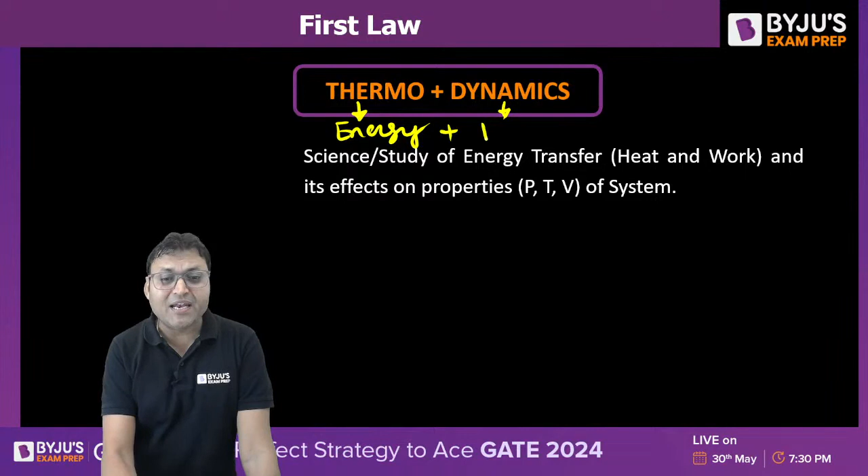Thermodynamics is nothing but energy in motion. So what does that mean? In thermodynamics, we study the energy transfer which can take place either in the form of heat or work, and the effect of this energy transfer on the properties of the system, right? That is known as thermodynamics. So we will be talking about the energy transfer through the first law of thermodynamics.

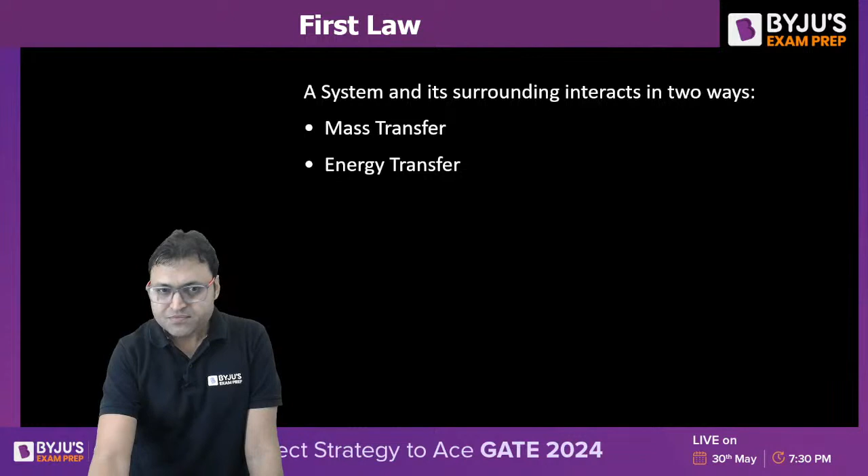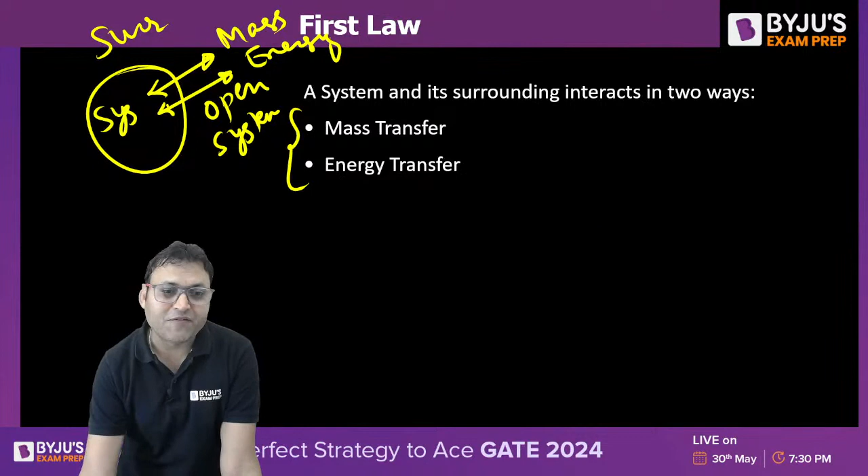Now, a system and the surrounding. Do you know what is a system? What is surrounding? A system and the surrounding interact with each other in two ways, either in the form of mass transfer or in the form of energy transfer, or both. So we are talking about open system. In case of open system, the interaction between system and surrounding can take place with the mass transfer or with the energy transfer. But if it is a closed system, then the mass transfer does not take place from the system to the surrounding.

I hope you guys are aware about that, because I am not talking about what exactly is a system, what is the surrounding, how the energy interaction or the mass interaction between system and surrounding takes place. But the overall picture is, a system is a region upon which our study is concentrated, and everything other than the system is known as the surrounding. So system and surrounding talk to each other in the form of energy transfer from the system to the surrounding or from the surrounding to the system.

And they talk to each other in the form of mass transfer. Mass can transfer from the system to the surrounding or from the surrounding to the system. That is about the open system. But if it is a closed system, it means no mass transfer takes place. For a closed system, the only interaction between system and surrounding is through energy transfer, and energy transfer can take place either in the form of heat or in the form of work, isn't it? Heat and work.

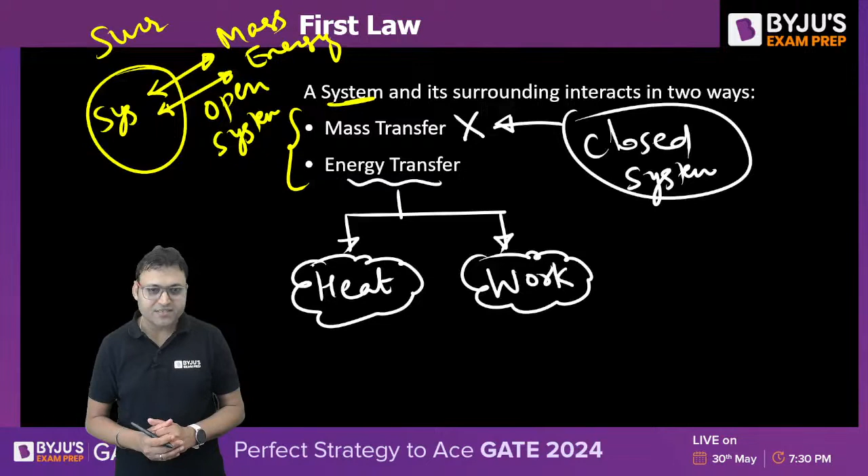And if it is an isolated system, do you know about isolated systems? There are three types of system based on the interaction between system and surrounding. In an isolated system, no mass transfer takes place between the system and surrounding, and no energy transfer takes place between the system and the surrounding. That is called an isolated system. Example is universe. Universe is an example of isolated system.

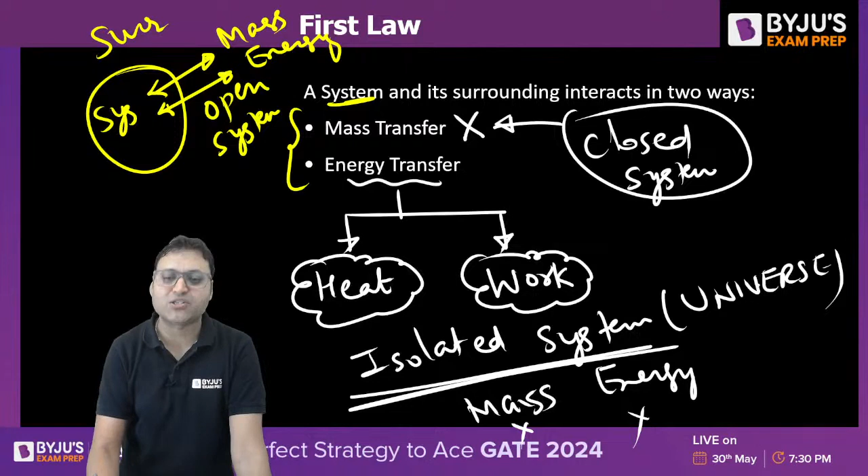Universe is nothing but system plus surrounding taken together. System as well as the surrounding taken together becomes the universe. So from the universe there is no mass transfer. From the universe there is no energy transfer. So the isolated system does not interact, neither in the form of mass transfer nor in the form of energy transfer.

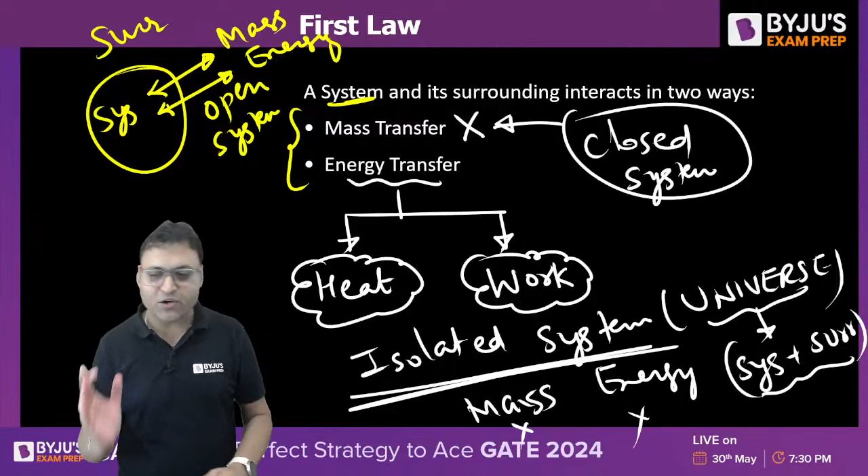All right. Now let us see what is heat transfer. The energy transfer due to temperature difference is known as heat transfer, denoted by Q. And heat transfer always takes place from high temperature to low temperature, isn't it? When T1 is greater than T2, the transfer of heat will take place from T1 to T2. If T2 is greater than T1, then the transfer of heat will take place from T2 to T1.

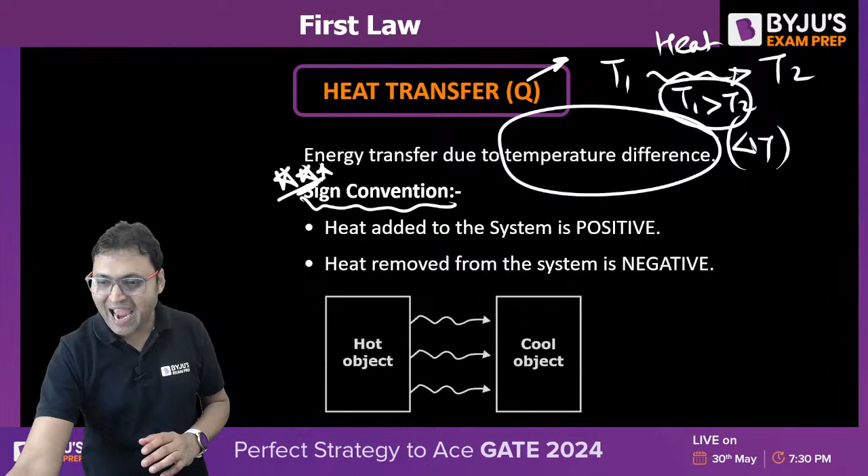Very, very important is sign convention, because sometimes the heat is transferred to the system or sometimes from the system to the surrounding. System is the region on which our studies focus. So whenever the heat is entering into the system, it will increase the energy of the system, so that will be taken as positive. And when the heat is rejected from the system, it will decrease the energy of the system. That will be taken as negative. So that is about heat transfer, denoted by Q. That is one form of energy transfer.

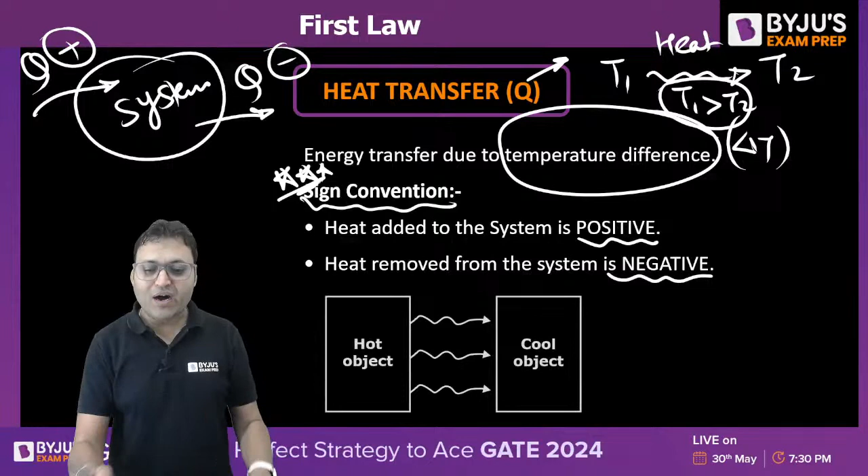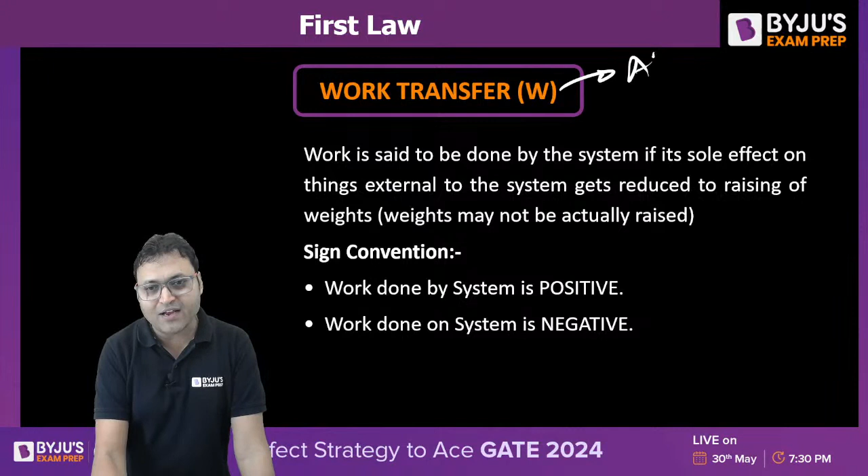The other form of energy transfer is the work transfer. In simple words, all the other forms of energy transfer other than heat transfer are known as work transfer. For example, if electrical energy is transferring to the system, we will call it electrical work transfer. If mechanical energy is getting transferred, we will call it mechanical work transfer. If chemical energy is getting transferred from the system to the surrounding or from the surrounding to the system, we will not call it heat transfer. We will consider it to be work transfer.

The technical definition of work transfer is this one. Work is said to be done by the system if the sole effect on the things which are external to the system can be reduced to raising of weights. The weights may not be actually raised. But how do we separate heat from work? When the energy transfer is taking place due to temperature difference, it is heat transfer. And when it is not due to temperature difference, it is called work transfer, right?

And the sign convention says work done by the system on the surrounding is taken as positive, whereas the work done on the system is... sole means entire, sole means complete effect, or entire effect, right Virendra? So work done by the system is taken as positive and work done on the system is taken as negative.

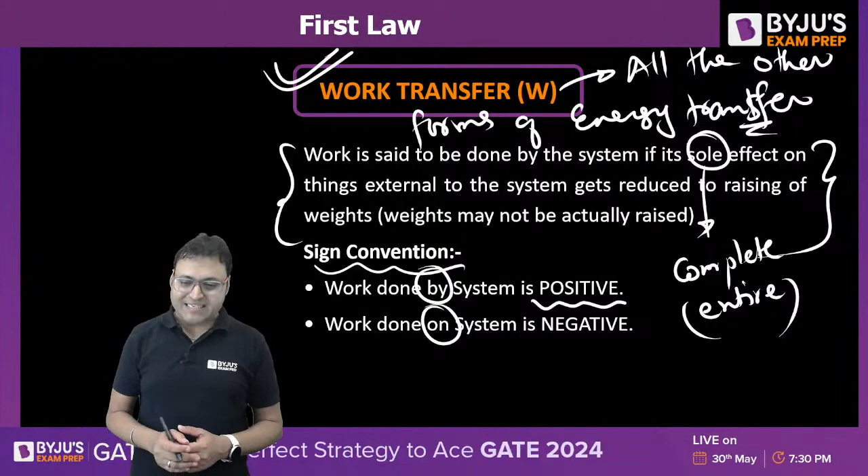So what I have discussed so far is the interaction between system and surrounding happens in two ways: mass transfer and energy transfer. Energy transfer can be divided into two parts, heat or work. Heat transfer happens when there is a temperature difference, and all the other forms of energy transfer happen without the temperature difference, right? If it is an open system, there will be mass transfer, but if it is a closed system, only energy transfer will take place. And if it is an isolated system, insulated system is different.

Thermally insulated system means there is no heat transfer. Insulated is not the same as isolated. When we say isolated system, mass transfer will be zero and energy transfer will be zero. When it is an insulated system, only heat transfer will be zero. There is a difference between insulated and isolated system, right?

So let us talk about the first law. We are ready to explore the first law of thermodynamics now.

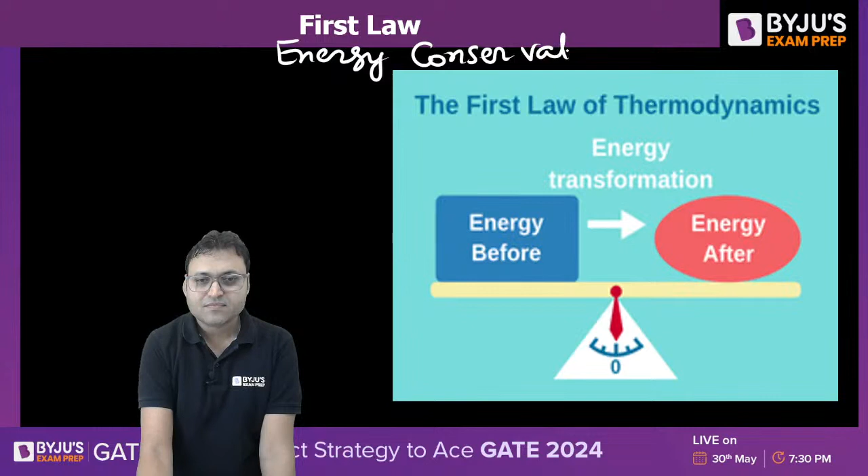So what do you understand by the first law of thermodynamics? Can you let me know what exactly is the first law? First law of thermodynamics is nothing but energy conservation law. It is also known as Joule's law. It is also called quantitative law.

Why do we call it quantitative law? Have you heard about that? The first law of thermodynamics is nothing but energy conservation law. We can also call it Joule's law because Joule was the first one who gave this law. And it is also known as quantitative law because energy has quantity, magnitude, as well as quality.

So the first law of thermodynamics does not talk about the quality of energy. It only says the quantity of energy remains constant. Energy conservation means energy always remains constant. Energy can neither be created nor destroyed, quantitatively. Qualitatively, there is a degradation of energy that we will discuss in the second law of thermodynamics.

All right. So according to energy conservation, for a system, can we say some energy will be entering and some energy will be leaving? So can we say the energy entering into the system minus energy leaving from the system is nothing but change in energy in the system?

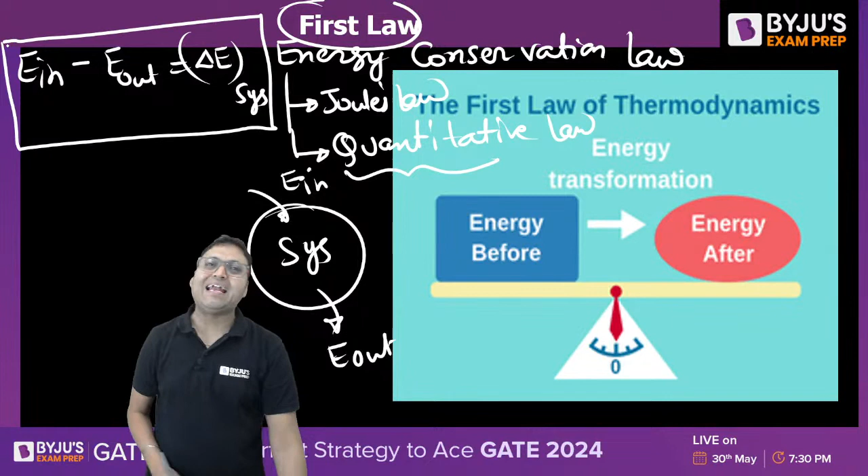Some amount of energy will enter into the system, some will leave, and energy entering is like your income, energy out is like your expenses. Your income minus expenses is your saving, isn't it? The energy entering into the system minus energy leaving from the system is nothing but change in energy of the system.

So let us try to understand the significance of these parameters, LHS as well as RHS. Let us talk about the RHS first. What exactly is the energy change of a system? What do you understand by the change in energy of a system?

Look, in thermodynamics we are talking about a simple compressible system. In fluid mechanics, we talk about incompressible fluid. For a simple compressible system, change in energy of a system is equal to change in internal energy plus change in potential energy plus change in kinetic energy of the system.

This is called microscopic energy because it is associated with the molecules. The energy stored inside the molecules increases the internal energy of the system. The other two are known as macroscopic because they are associated with the system: change in potential energy and change in kinetic energy. So the total energy change is microscopic energy change plus macroscopic energy change, right?

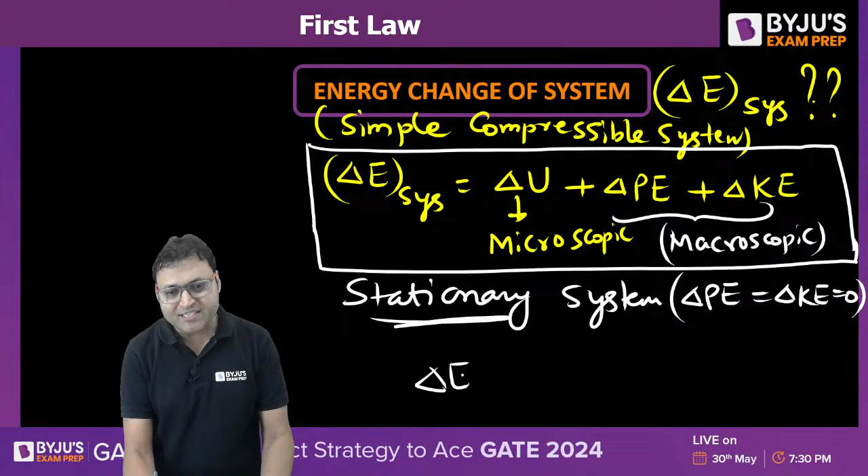If the system is stationary, there is no change in potential energy and no change in kinetic energy. For a stationary, simple compressible system, change in energy of the system is nothing but change in internal energy of the system. U is known as internal energy, which is associated with the molecules of the system. That is why it is known as microscopic.

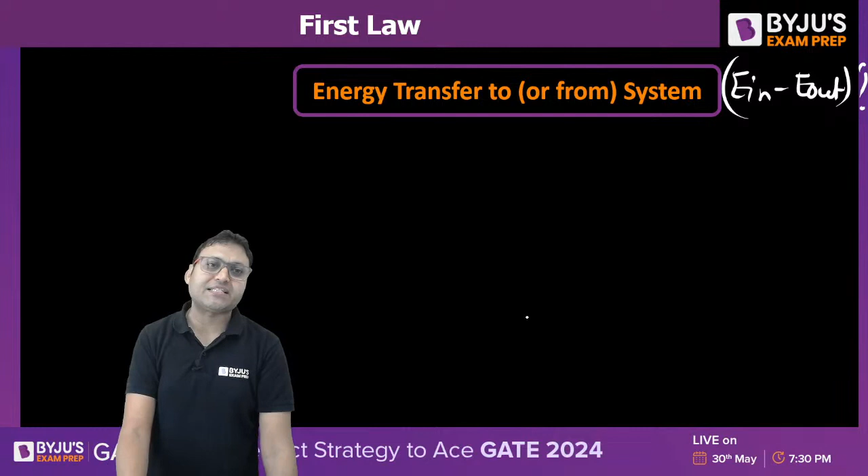Now, what is the energy transfer E in minus E out? That is the energy transfer from the system to the surrounding or from the surrounding to the system. So we can say E in minus E out. The energy interaction takes place in the form of heat transfer, right? So we can say Q in minus Q out in terms of heat transfer.

It can take place in terms of work transfer, W in minus W out, and it takes place in the form of mass transfer, or there is some energy associated with the mass transfer. So we can say energy in along with the mass transfer minus energy out along with the mass transfer. So the total energy interaction will take place in three ways. One is in the form of heat transfer, another is in the form of work transfer, and the third one is associated with the mass transfer.

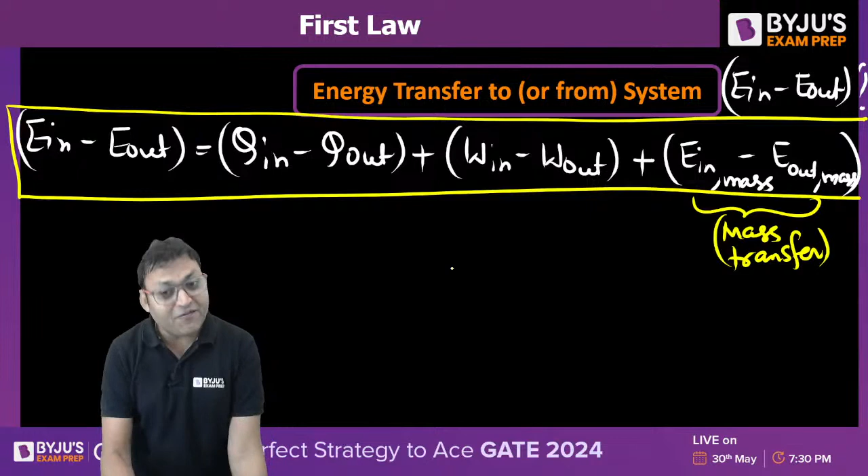If there is a mass transfer taking place from the system to the surrounding, there is some energy associated along with the mass transfer that is represented by the third term. And if it is a closed system, what about the mass transfer? Do you agree mass transfer will be equal to 0? I had already told you. For a closed system, the mass transfer will be 0. And if the mass transfer is 0, this term will become 0.

Do you agree or not? For a closed system, the third term will be equal to 0. This is the first term, this is the second term, this is the third term. Do you guys understand it or not? Please give me yes.

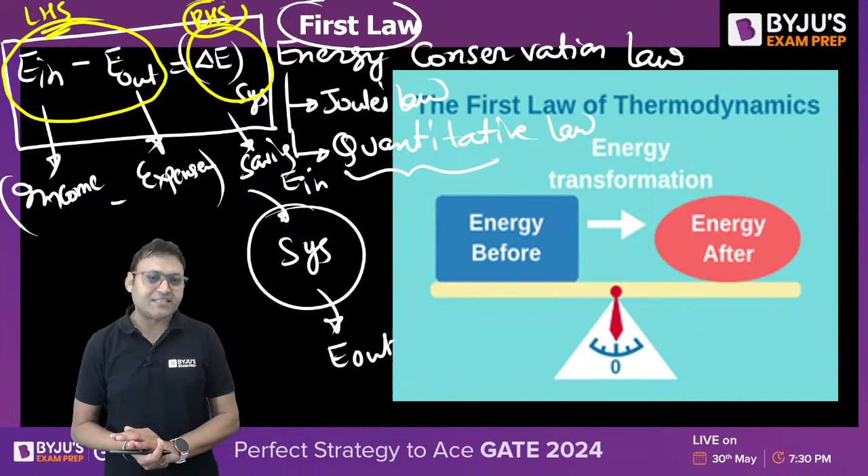So can we say energy entering into the system minus energy leaving from the system is simply Q in minus Q out plus W in minus W out. That is for a closed system. Right? This is the expression. So for the first law of thermodynamics, which involves LHS and RHS, the energy interaction between the system and surrounding is equal to change in energy of the system. That is what we have discussed.

The change in energy of the system is simply the potential energy change, kinetic energy change, and the internal energy change. The energy transfer is along with the heat transfer, the work transfer, and the mass transfer. And if it is a closed system, there is no mass transfer taking place. So we can say the energy transfer is with the heat transfer and with the work transfer only.

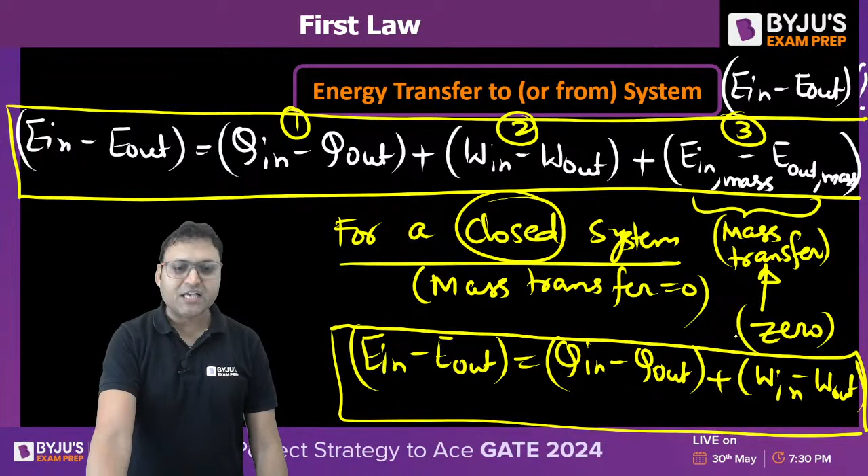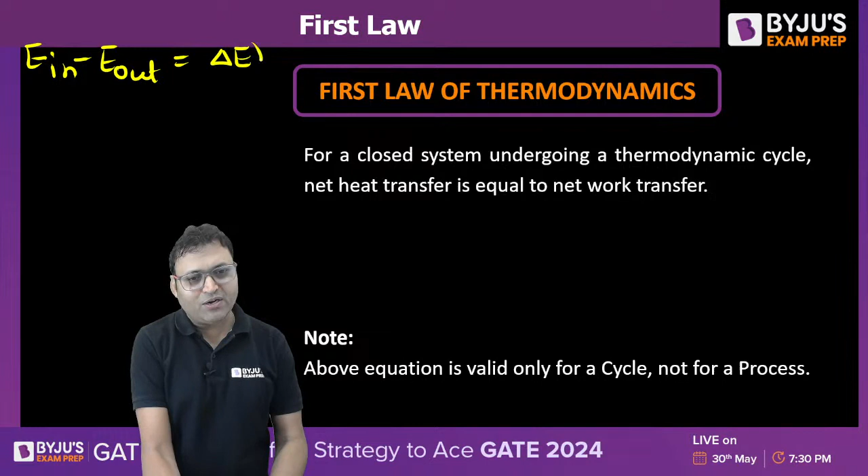Now let us modify this first law of thermodynamics. What is the first law of thermodynamics? It says E in minus E out is equal to change in energy of the system. That is the basic energy conservation equation. When it is a closed system, do you understand mass transfer will be equal to 0? For a closed system, mass transfer will be 0.

And if it is undergoing a thermodynamic cycle, do you know thermodynamic cycle? For a thermodynamic cycle, the initial and final points remain the same. So do you agree, for a thermodynamic cycle, delta E, change in energy of a system undergoing a thermodynamic cycle, will be 0. So we can say E in will be equal to E out. Or we can say Q net, the net heat transfer, is equal to W net, net work transfer. That is the first law applied for a closed system undergoing a thermodynamic cycle.

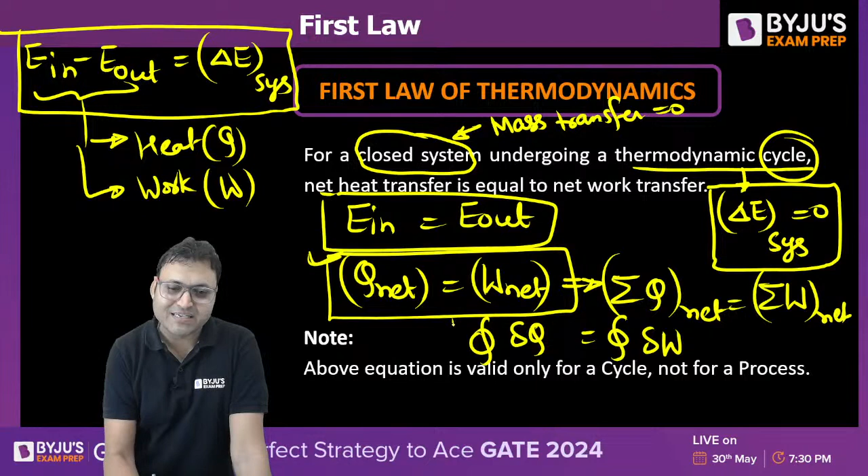Or we can say sigma Q net is equal to sigma W net, because energy interaction will take place in the form of heat transfer and in the form of work transfer. So net heat transfer should be equal to net work transfer. Or we can say cyclic integration of del Q is equal to cyclic integration of del W, because heat and work are path functions, they are not properties. So this equation is valid only for a cycle.

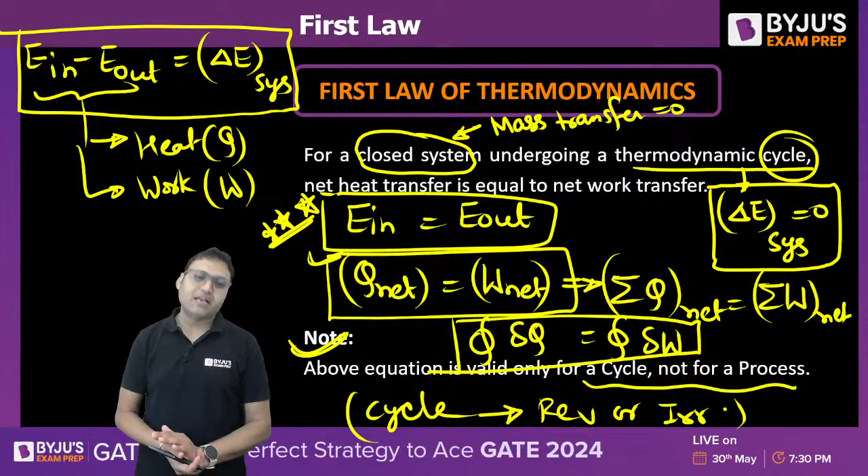This is another way of representing the first law of thermodynamics applied for a closed system undergoing a thermodynamic cycle. So net heat transfer will be equal to net work transfer. It is valid only for a cycle, not for a process. And the thermodynamic cycle can either be reversible or it can be irreversible. Do you understand it?

Let me take an example. If there is a system undergoing a thermodynamic cycle 1 to 3, Q1 to 2 is positive, heat added to the system, Q2 to 3 is negative, heat rejected from the system, and Q3 to 1 is also positive, heat added to the system.

Then work done during this cycle: work done W1 to 2 is positive because it is done by the system. W2 to 3 is negative because it is done on the system, and W3 to 1 is again positive because it is done by the system. So we can say Q net is equal to W net. This expression will be used with sign.

They must be used with sign. So we can say Q1-2 minus Q2-3 plus Q3-1 should be equal to W1-2 minus W2-3 plus W3-1. That is the first law of thermodynamics applied for a cycle. Or we can write it as Q net is equal to W net.

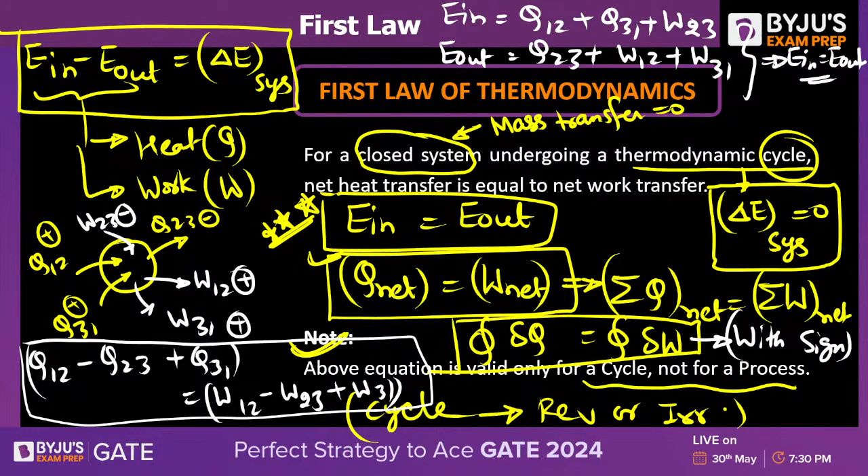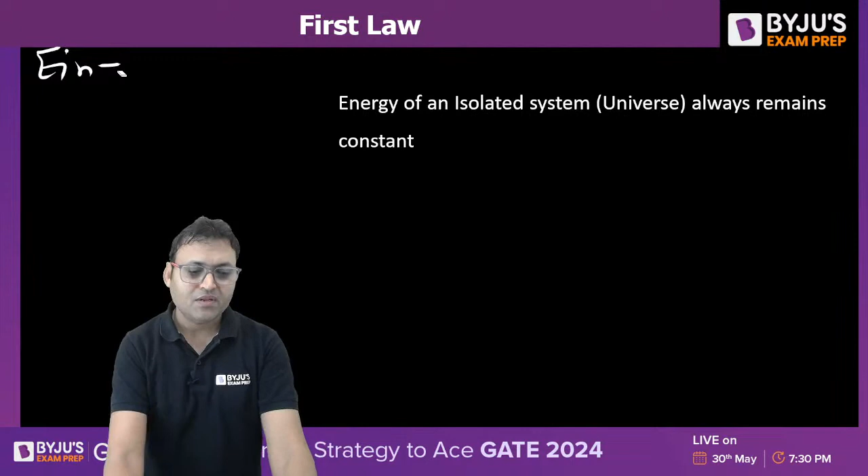Q1-2 plus Q3-1 plus W2-3 is equal to Q2-3 plus W1-2 plus W3-1, isn't it? So either we say E in is equal to E out, or we can say Q net is equal to W net for a thermodynamic cycle. And if it is an isolated system, I told you, E in minus E out is equal to change in energy of the system. That is our first law of thermodynamics.

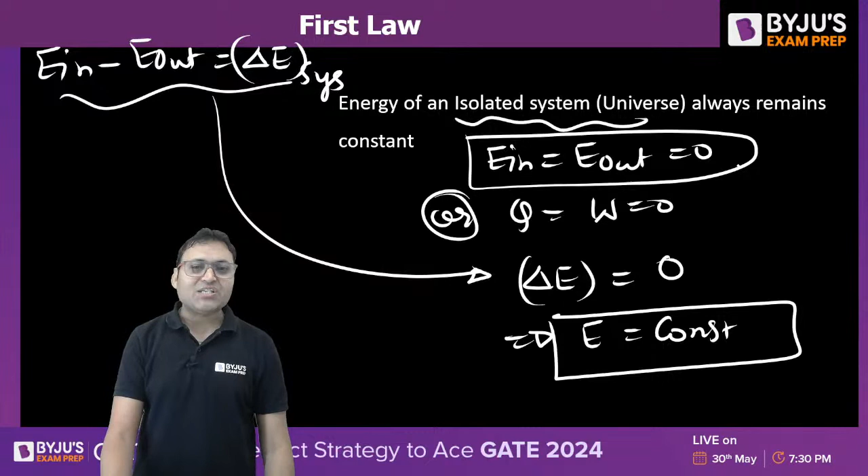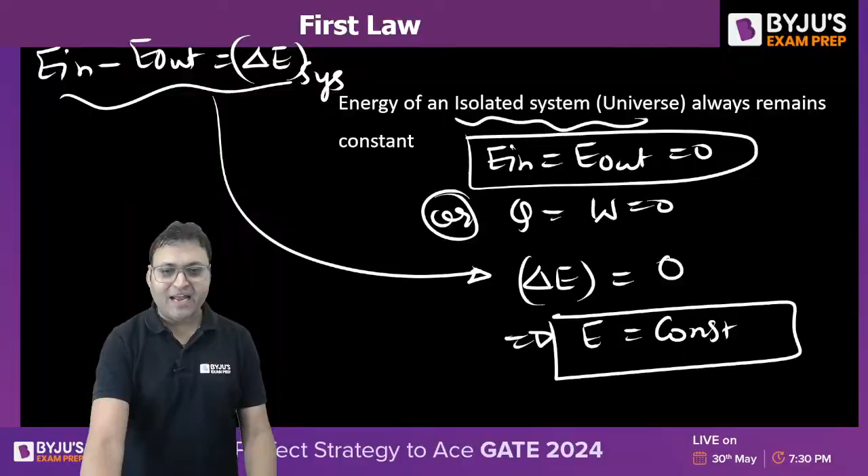For an isolated system, there is no energy entering, there is no energy leaving, it is equal to 0, or we can say Q is equal to W is equal to 0. So if this is 0, then from the first law of thermodynamics we can say delta E is equal to 0, or energy remains constant. The total energy of an isolated system always remains constant, because an isolated system does not involve any mass transfer, does not involve any energy transfer. So for an isolated system, the energy change will be 0, or the isolated system will have constant energy throughout.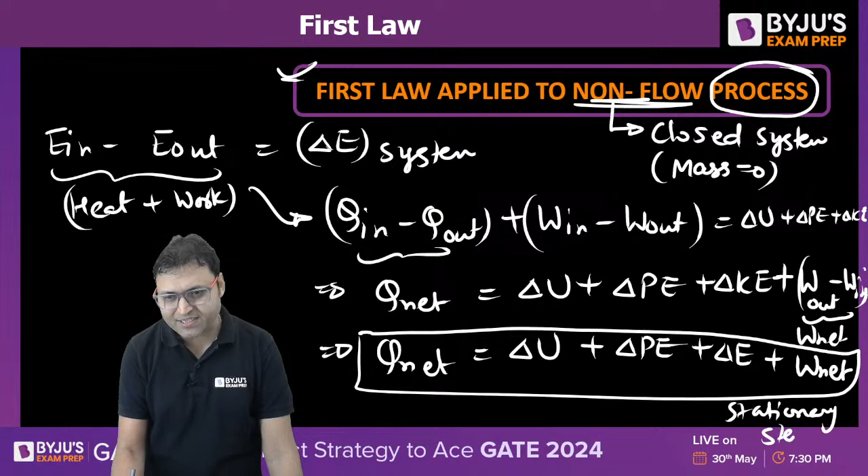So we can say Q net is equal to delta U plus change in potential energy plus change in kinetic energy plus W net. This is another way of writing our energy conservation equation for a closed system undergoing a process. And if there is no change in potential energy and kinetic energy, for a stationary system, can we say Q net is equal to delta U plus W net? Do you agree?

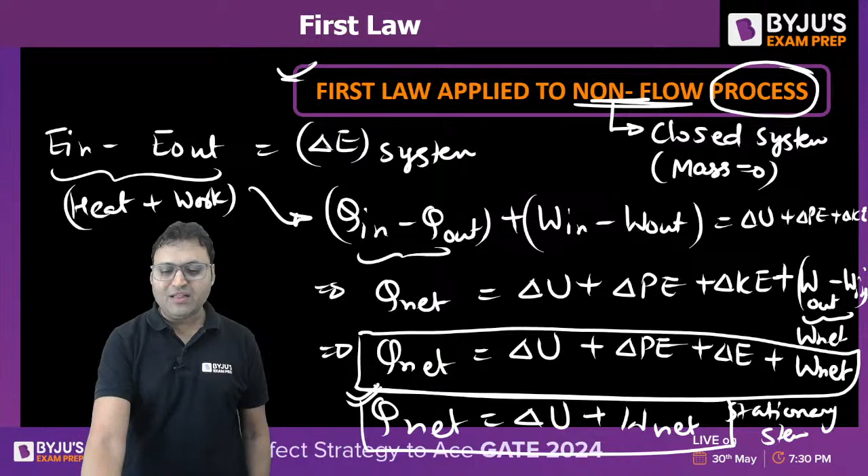For a stationary system, Q net is equal to delta U, change in internal energy, plus W net, that is the net work transfer. Use with sign. All the parameters should be used with the sign. That is the first law applied to a non-flow process.

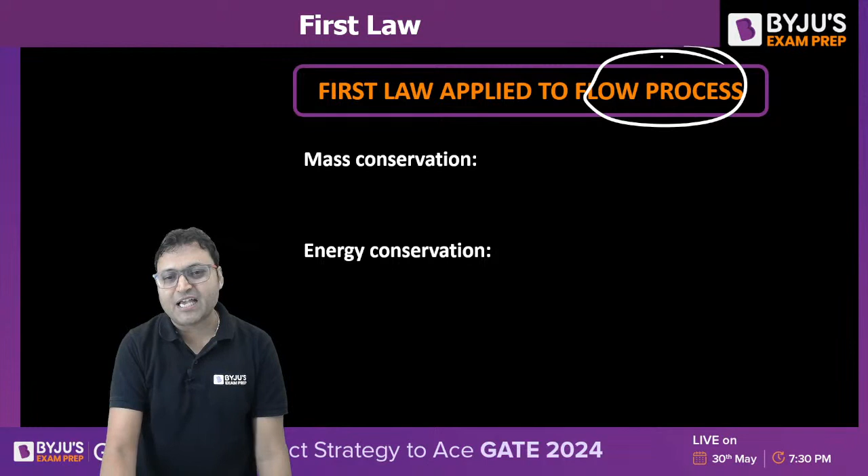And if it is applied to the flow process, there is mass transfer that takes place in the flow process, or we can call it an open system. Flow process means open system. There is a mass transfer along with the energy transfer. That is the difference between closed system and open system. So there is a mass transfer. So we can say M in minus M out is equal to change in mass in the control volume.

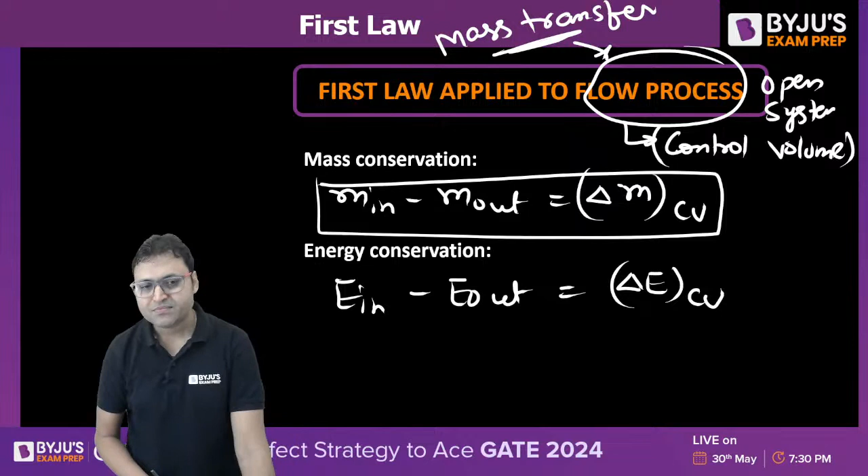The way we write the energy conservation is E in minus E out is equal to change in energy in the control volume. For the flow process, we use the control volume approach. We define a control volume if there is a mass flow taking place. So this is the energy conservation equation. Mass conservation and energy conservation equations can be written like this.

And this energy interaction takes place along with the heat transfer, along with the work transfer, and the energy transfer takes place along with the mass transfer, isn't it? It takes place along with the mass transfer.

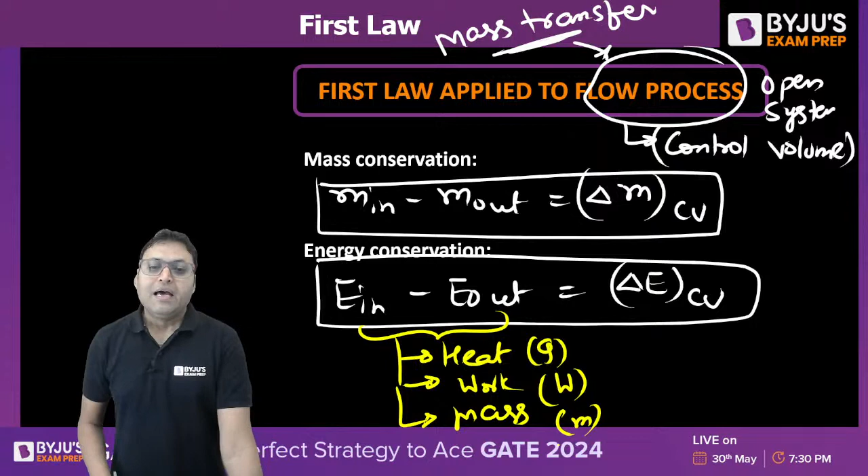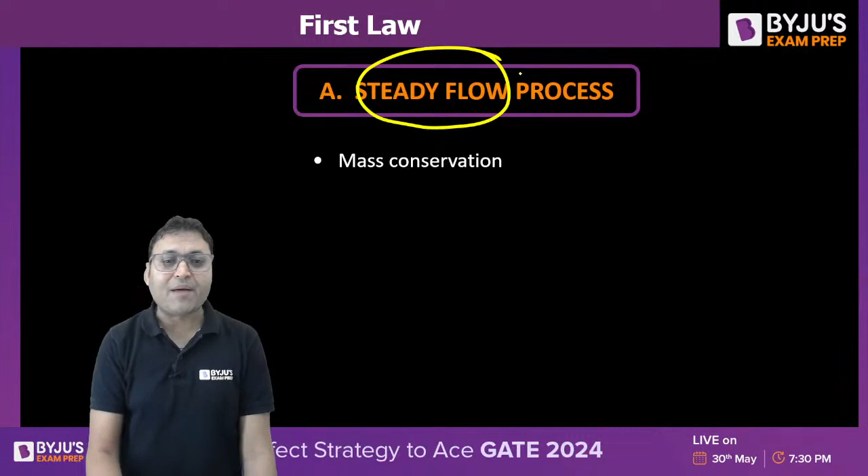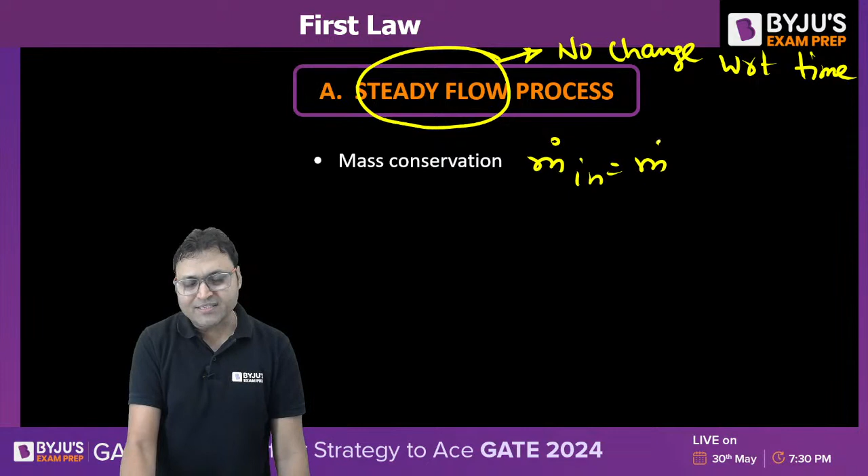Now the flow process can be divided into two parts. One is called the steady flow process. What is the steady flow process? When the parameters do not change with time. No change with respect to time. That is called a steady flow process. For a steady flow process, we can say mass flow rate remains constant. M dot in is equal to M dot out remains constant.

Or we can say the change in mass per unit time in the control volume will be equal to 0. That is the mass conservation for a steady flow process. For a steady flow process, change in mass in control volume will be equal to 0. So M dot in is equal to M dot out. Rho 1 A1 C1 is equal to rho 2 A2 C2. Mass flow rate entering will be equal to mass flow rate leaving.

C is the velocity of flow, and A is the flow area, and rho is the fluid density of compressible fluid or density of the system, right?

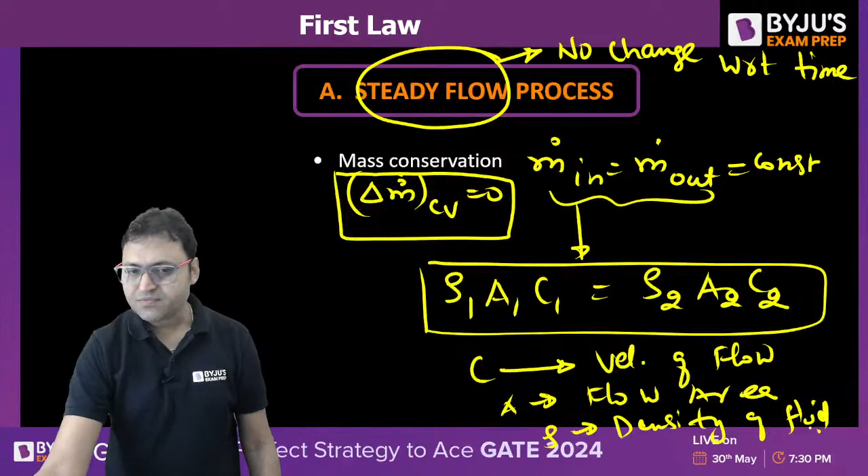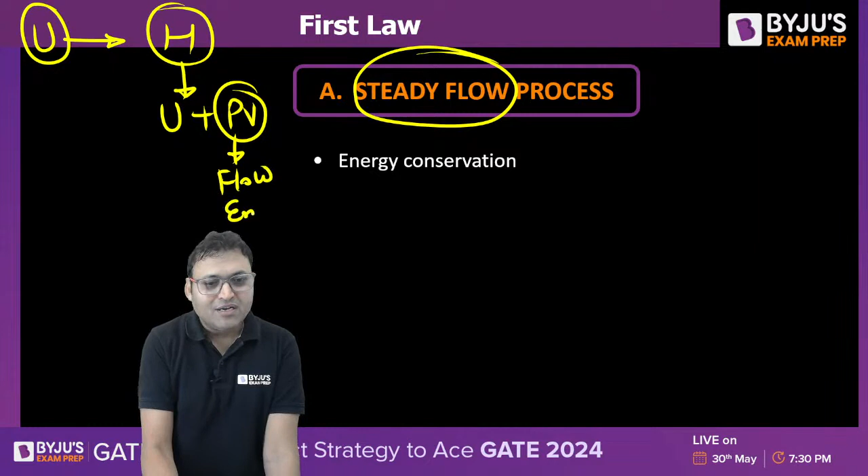And if we talk about the energy conservation for a steady flow process, look, U is internal energy, it will be replaced by H. This is the internal energy which will be replaced by H. Are you getting it? Why? Because H involves U plus PV. What is PV? That is called flow energy. The energy associated with the mass flow, that is called flow energy.

I told you that whenever there is a mass transfer taking place from the system to the surrounding, along with the mass transfer there is an energy transfer associated, and that energy transfer is called flow energy, which is associated with the mass transfer. So internal energy will be replaced. Our earlier equation was Q net is equal to delta U plus W net.

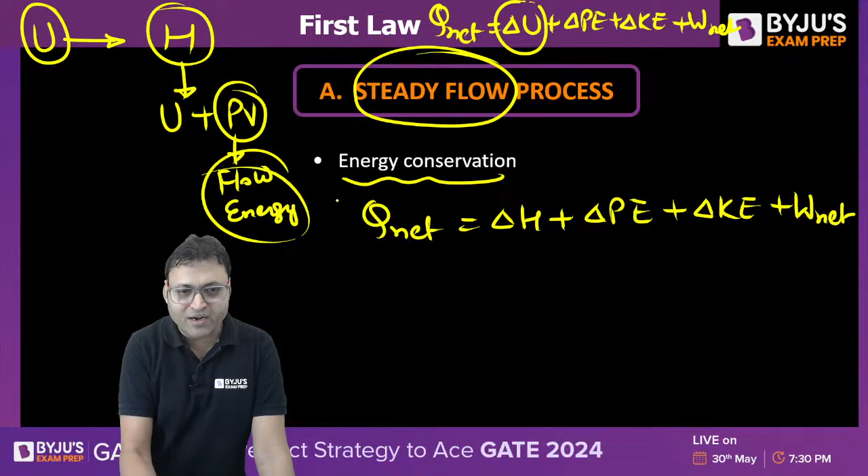Do you remember? So for a closed system, the first law was Q net is equal to delta U plus delta PE plus delta KE plus W net. So here U will be replaced by H. So the energy conservation equation will be Q net is equal to delta H plus delta PE plus delta KE plus W net. That is for steady flow process. That is the energy transfer.

If we write per unit time, delta H is H2 minus H1. Potential energy M into g into Z2 minus Z1. Isn't it? Change in kinetic energy half into M into C2 square minus C1 square. H can be written as M into h2 minus h1, specific enthalpy.

If we write it per unit mass, then we can say h1 plus C1 square by 2 plus gZ1 plus Q CV is equal to h2 plus C2 square by 2 plus gZ2 plus W CV. This is the energy conservation equation for a steady flow process.

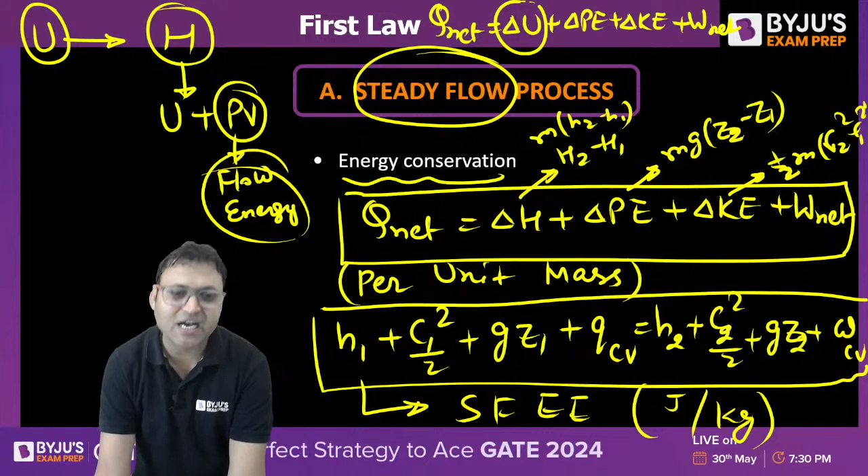What do we call it? Steady flow energy equation. And what is the unit of each and every term? It is joule per kg. This is known as the steady flow energy equation. That is how we obtain the steady flow energy equation for the steady flow process, right? And if it is an unsteady flow process, then things become a little more complicated.

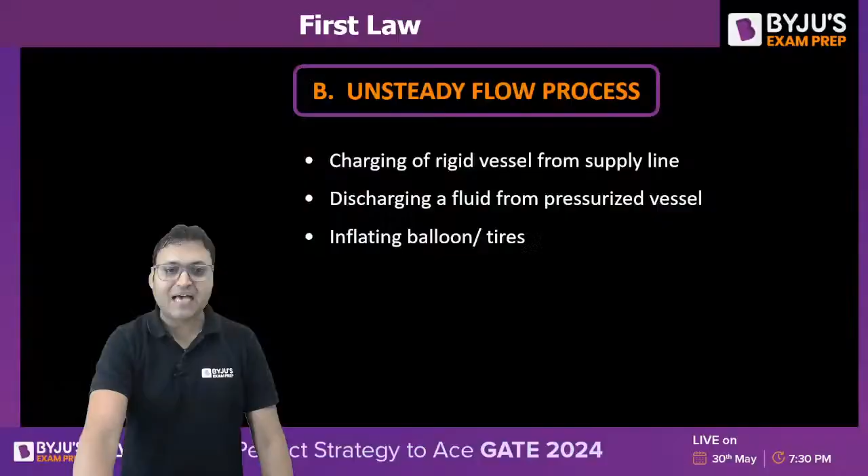All right. So let us talk about the last thing, that is the first law of thermodynamics applied to the unsteady flow process. Unsteady flow, when there is change with respect to time. Examples of unsteady flow processes: charging of a rigid vessel from a supply line, discharging of a fluid from a pressurized vessel, inflating a balloon.

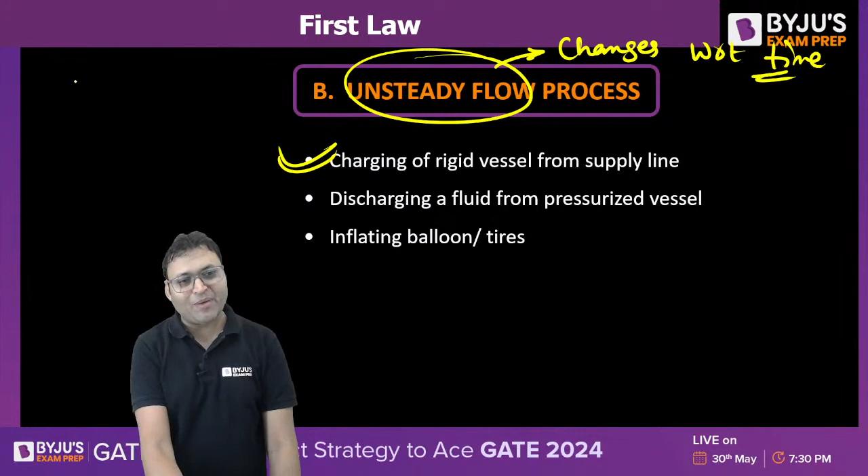This is our control volume, let us say, and the control volume is undergoing a process 1 to 2 due to some fluid entering at the inlet and fluid leaving at the exit. I for inlet, E for exit or outlet. 1 is the initial state and 2 is the final state. These are the notations we are going to use to develop the expression.

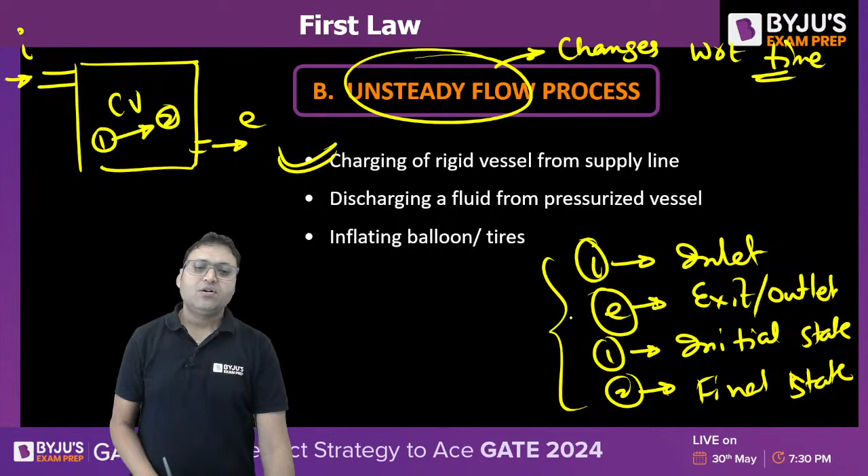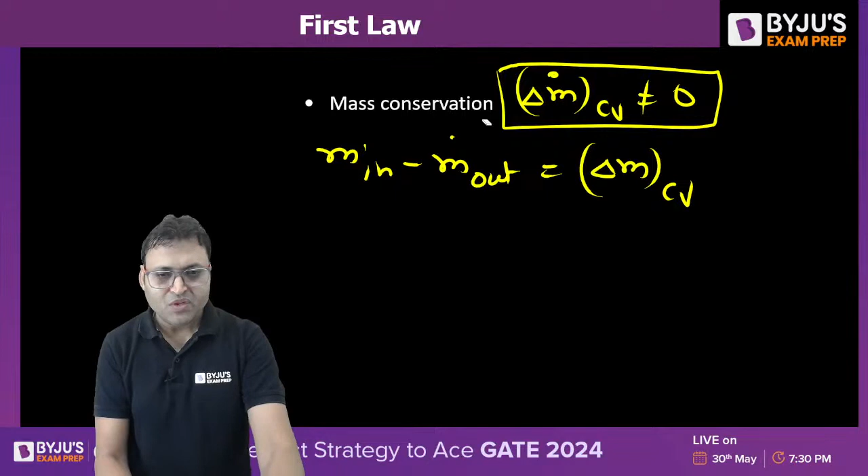So if we talk about the mass conservation, the rate of change of mass is non-zero, or we can say m in minus m out is equal to change in mass in the control volume. That is the mass conservation equation, and it is simple. M in minus M out will be equal to change in mass in the control volume, or we can write it as Mi minus Me is equal to M2 minus M1 in the control volume. This is the mass conservation equation.

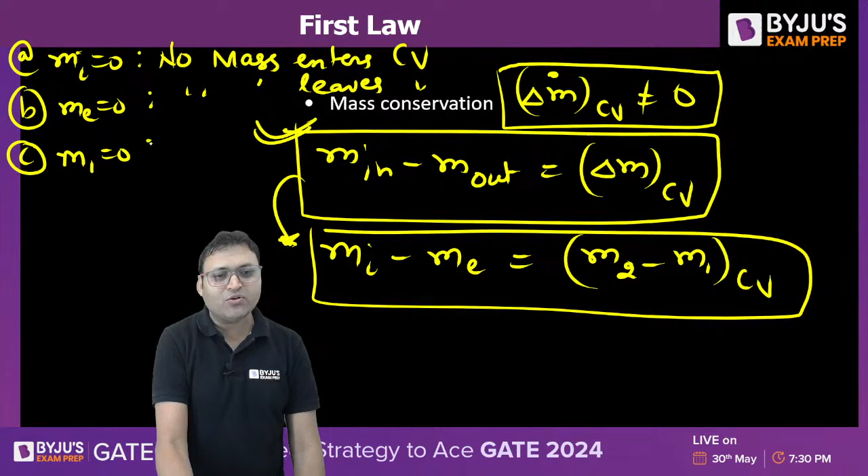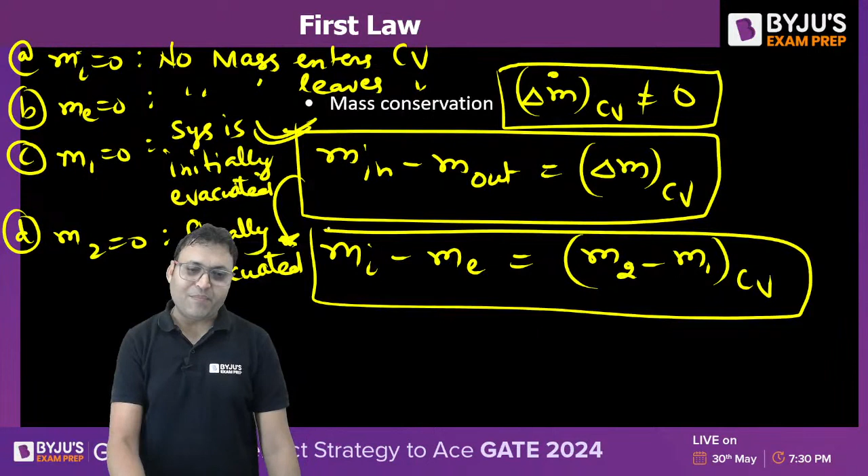So Mi will be equal to 0 when no mass enters the control volume. Me will be equal to 0 when no mass leaves the control volume. And M1 is equal to 0 when the system is initially evacuated. And M2 is equal to 0 when the system is finally evacuated. So one or more terms can be 0 based on the given condition. This is about the mass conservation.

And if we write the energy conservation equation for this, what is our energy conservation equation? What we know is Q net is equal to delta H plus W net. Now, this was for a steady flow. For unsteady flow, our basic energy conservation equation was E in minus E out is equal to change in energy of the system or the control volume.

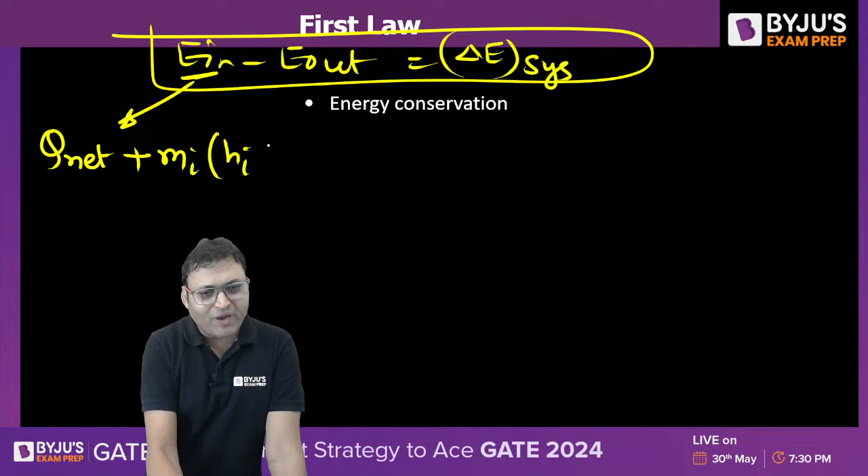So if we write it, Q net, that is the heat entering into the system, plus Mi into (Hi plus Ci square by 2 plus Gzi), minus W net, minus Me into (He plus Ce square by 2 plus Gze), is equal to change in energy of the system. Can we write it as delta U plus delta PE plus delta KE? This will be the expression.

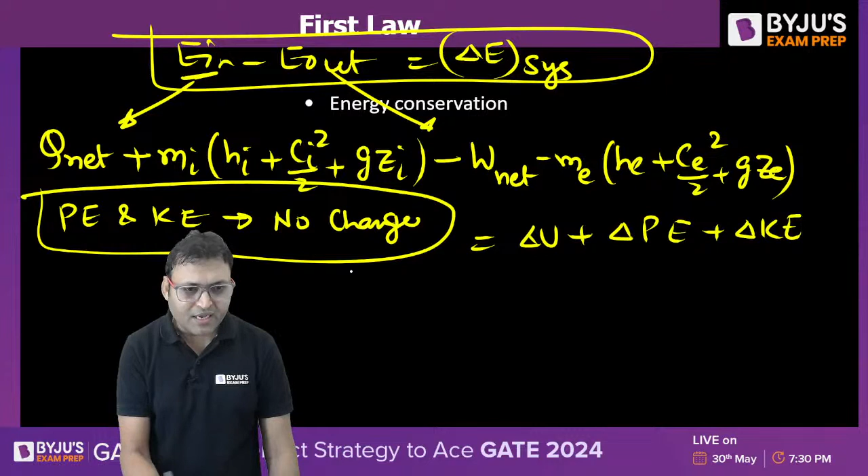And if there is no change in potential energy and kinetic energy, then our equation will become Q net plus Mi into Hi minus W net minus Me into He is equal to M2U2 minus M1U1 in the control volume. This is our energy conservation equation.

Small u is called the specific internal energy, and h is called the specific enthalpy per unit mass. So this is how we can write the energy conservation equation for a flow process which is an unsteady state flow process.

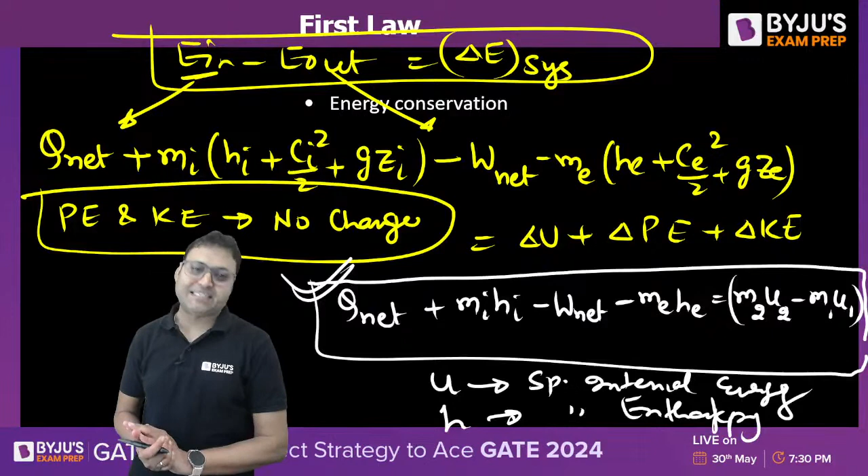All right. So that is all from my side for the day. On Friday again, I will be coming for the second law of thermodynamics. And on Saturday, we will be having the practice session for the first law as well as the second law.